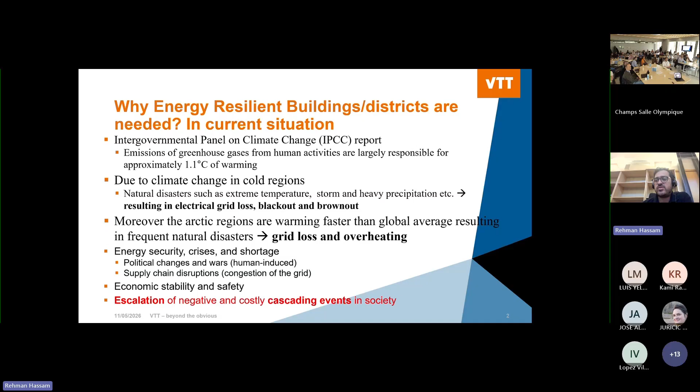So as I mentioned, some of the challenges are remoteness and lack of resources, for example, fuel. There could be cold waves. Then there's the risk and high cost of maintenance, accessibility issues, and things like that. Then there are construction challenges because the land is different. And if we look into energy security or any grid loss, then the indoor temperatures can drop very fast as well. So this can have an effect on humans as well.

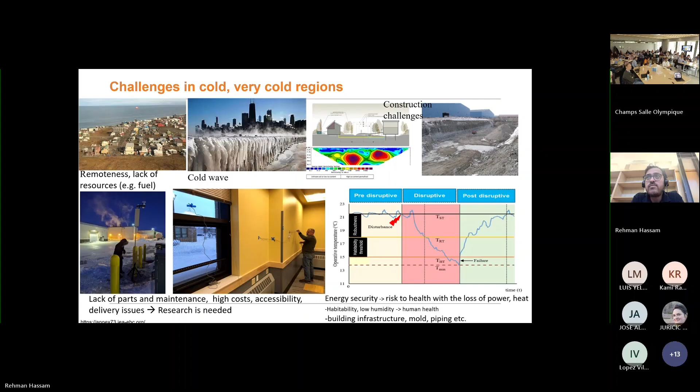But broadly, resilience is looking into unpredictable factors, which in terms of likelihood may not be so high, but impact-wise are quite high. And then there are other terms like stability, reliability, robustness, flexibility. These are some quite common words that are being used as well. So there is overlap in many elements, but there are certain differences as well.

And for resilience, the main components at the concept level are basically: if there's a building and it faces some source of disruption, for example, a natural disaster, an economic situation, energy shortage, or a failure in the technology, then it can cause some disruption or decline in services. Then it can have an effect on the occupants or on the technical systems in the building.

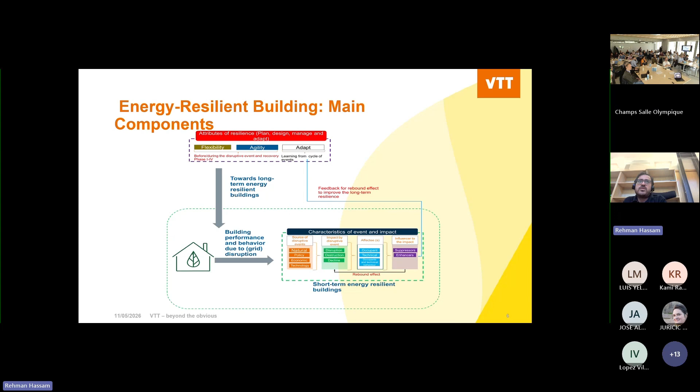So basically we look into these elements and how we can cope with any situation. So either we need to have flexible systems, or we need to have agility, or we need to adapt as well. So we need to make systems a bit more robust than they are.

For defining energy resilience, or how we estimate it, first we need to know resilience to what. This is one question that we need to answer. Resilience for what? And then what are the KPIs or indicators, and then we do the assessment as well. So these are some of the bigger questions that we first need to define to develop our energy resilience solutions for the building.

And the overall definition of an energy resilient building is a building that can maintain, especially during any kind of blackout or power outage situation, the indoor temperature within the habitability thresholds, and also provide survivable conditions. Habitability looks into the temperatures or comfort, the indoor temperature, and survivability looks into the other appliances or electrical loads which are essential, for example.

And the aim is to reduce the impact on the health of the building occupants, also reduce the damage to the building structure, and also look into energy efficiency as well. And the final target is to improve the long-term resilience for any future disruptive event. So basically, we try to learn from the current situation and then improve as well.

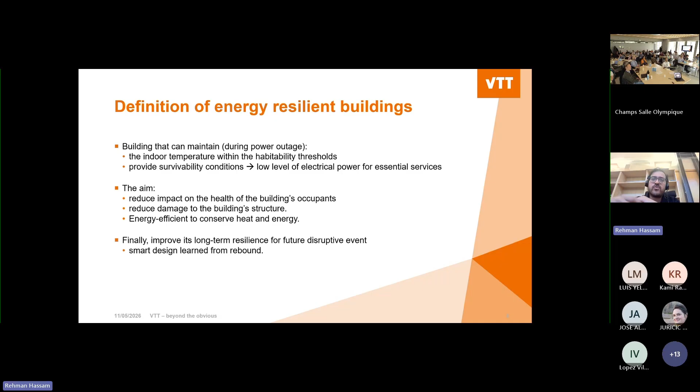So that was the background, and now I can briefly tell you about the Annex 93. This Annex 93 looks into the resilience of the buildings in cold regions.

So what the earlier presentation was there. So we try to look into these challenges of, for example, snow and how it affects the performance of the building, especially during extreme climate situations, heat waves, cold waves, those kind of things, and also in the power outage.

And some of the main objectives that we are looking into is to identify what are the threats. We need to know the threats because these cold regions are not only in the north of Europe, but there is Canada, USA, Japan, and these regions are there as well. And we are working with all these countries in this annex.

And so the main objective is to identify what are the local specification, what are the threats of these cold regions. Then we try to identify some of the case studies for the resilient buildings and communities. So what are the building practices? What are, let's say, the energy systems as well? And what are the local guidelines? And then make this kind of a best practice or guidebook on this.

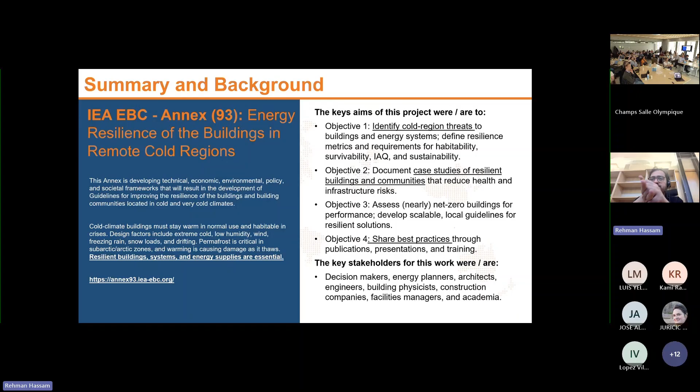This is the theory of change. So on the left, we have the problem statement, the problems that I was discussing before. And in the input, we have literature review, some of the stakeholders engagement, case studies, and the simulation studies and data collection. And basically, we are trying to provide this guideline or the guidebook for different stakeholders, mainly for the practitioners. And of course, it's useful for the researchers as well. And also, we plan to have a policy brief on this.

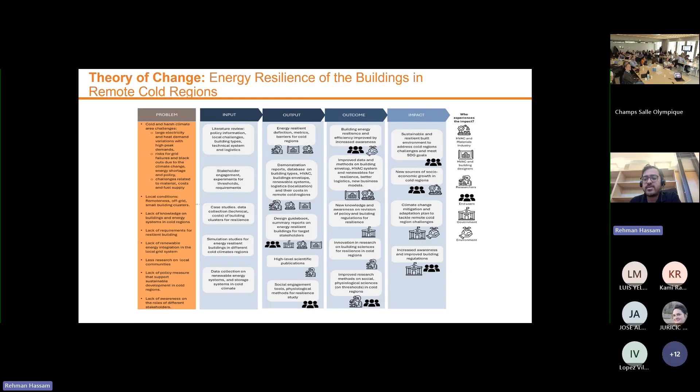This project is divided into 4 subtasks. So first subtask is establishing the definition, what are the challenges of the cold regions, and also looking into the definitions which are there. Then subtask 2 mainly looks on the building envelope, the structure. And maybe this is something that is interesting for the Annex 94 to collaborate with.

The subtask 3 looks into different energy systems, what are being used or what are there or the possibility. And then subtask 4 is looking on developing the guidelines and the guidebook and also disseminating as well.

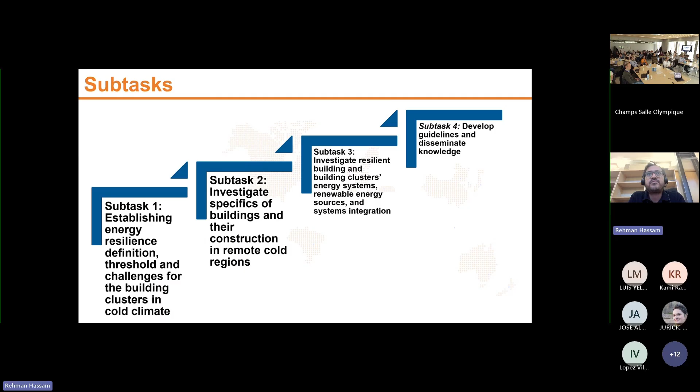In the guidebook, we have basically 9 chapters. So chapter 1 is mainly on subtask 1, chapter 2 is on subtask 2, and then 3 is on the last section. And in this chapter 4, we have this building envelope design, and again, this is something that could be interesting for this Annex 94 activity, especially with this cold region, what was being discussed just now.

Yeah, the key question is whether building design can meaningfully enhance the resilience of the buildings, especially in the cold climate. And the key research priorities are performance assessment under extreme climate events. So that's a very good example again for the snow that was being discussed right now. So it would be interesting to have this kind of case study in the Annex guidebook.

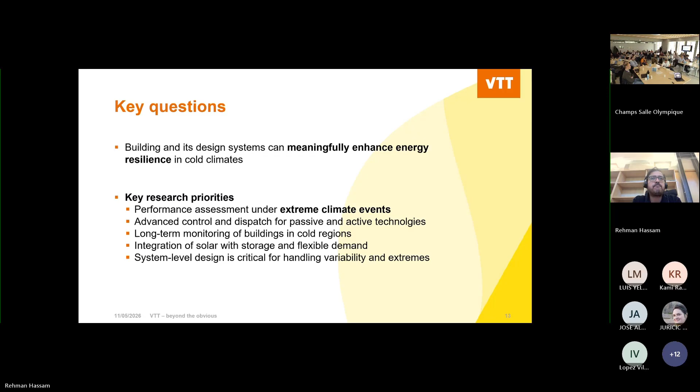And so far, we just started this year. So we had some meetings, and this was in Iceland. The idea was to go to these remote regions to have the understanding of how it is. Then we had another meeting in Narvik, which is again in the Arctic region in Norway. And we are having some case studies from Narvik, some of the buildings that are there and under renovation. So we are looking into these elements. There are different challenges like mold as well, for example.

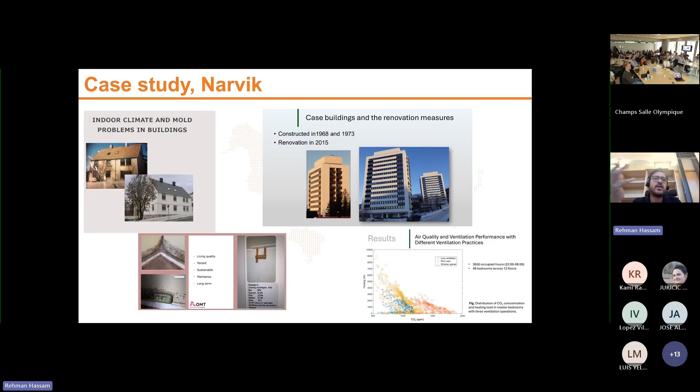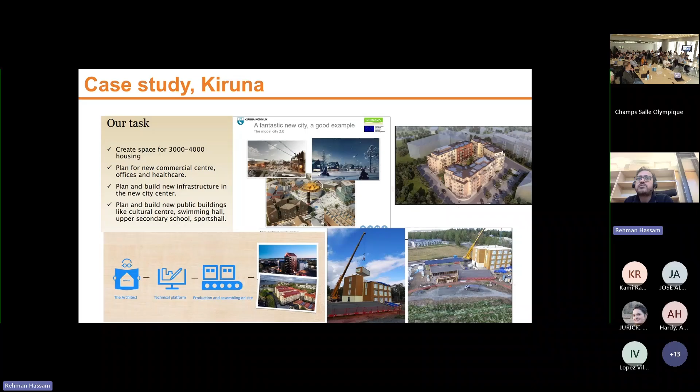So there are a lot of new buildings there, and it's a very interesting place to be, I think, to look into how they are shifting and what technology they are using there, especially looking into the climate challenge of snow and everything.